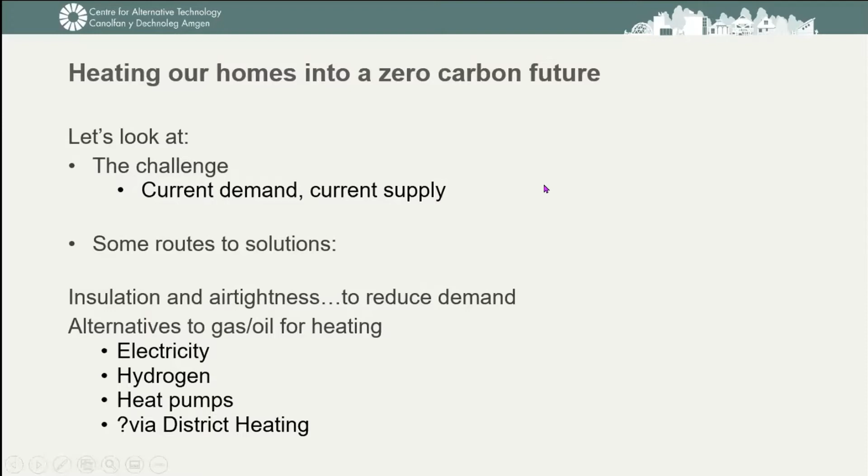So we're sometimes reassured by the idea that 41% of our energy this year or this month or today has come from renewables. But then we're faced with this data, which suggests otherwise, and this is our domestic energy use.

And it's not so very different from our national energy use in lots of ways, in that we use a lot of gas. We use a lot of gas in heating our homes. In particular, we use a certain amount of oil. About 25% of the energy we use in our homes, which isn't just all for heating, is electricity, and then there's some use of biofuels.

So how does that fit the 41%? Let's have a look. That 41% is just 41% of our electricity demand that is dealt with by renewables.

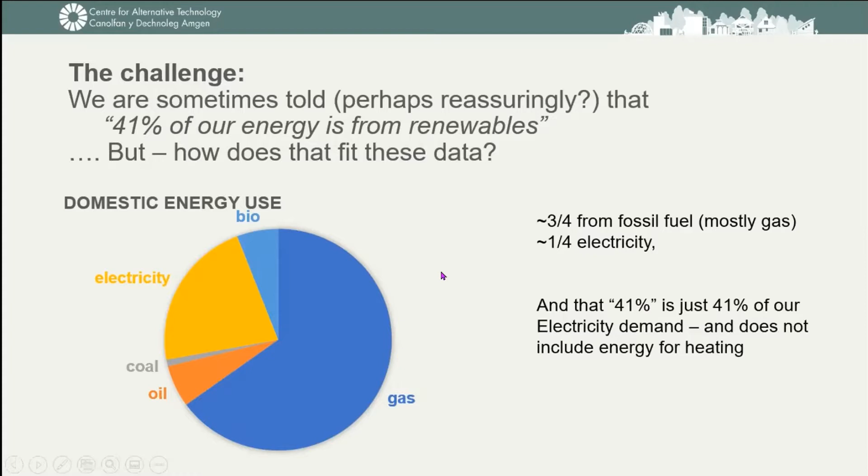So it doesn't include very much of the energy for heating at all. So if 41% of that quarter there, that was yellow on that one, is from renewables, then essentially none of the rest is from renewables.

And if we use 3/4 of the energy used in our home for heating, that's about 8 times more energy than is currently generated from renewables in terms of our in-the-house proportion, or 7 times more than renewables plus nuclear, which is a low carbon energy source in at least many respects.

And if we include biofuels, it's still 5 times more than renewables. The energy we use for heating is still 5 times more than that proportion than is generated from renewables.

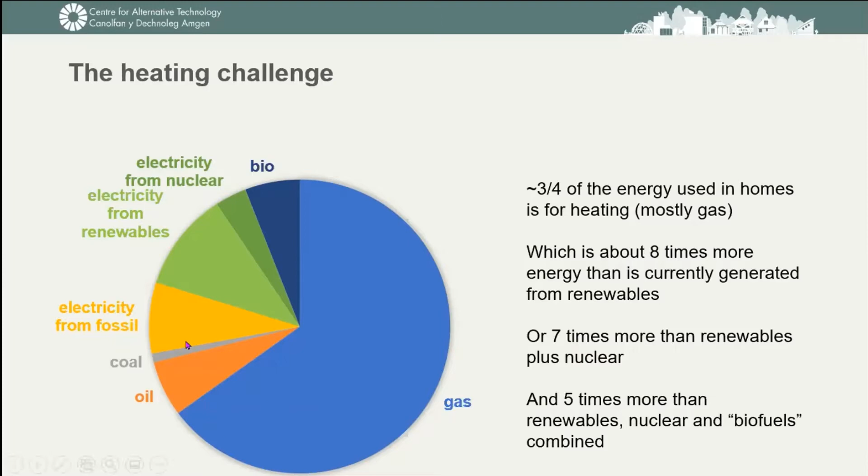So we've got to do something pretty drastic to generate enough more energy to cover that, or to reduce our energy demand so that we're within that range, within the range that is supplied by renewables, or that can be supplied. So we probably need to approach this from both ends.

One additional challenge is that our heating demand, as we're all here sitting with at least cold weather outside the windows, some of us warmer, some of us cooler, some of us in dressing gowns and warm jumpers, some of us with just a bit of heating on, very aware that there's a seasonal dependence to our heating.

We use something like 6 or 7 times more energy per day, per week in the winter for heating than we do in the summer. The summer being predominantly for hot water, at least. And this doesn't include any significant demand in here for cooling.

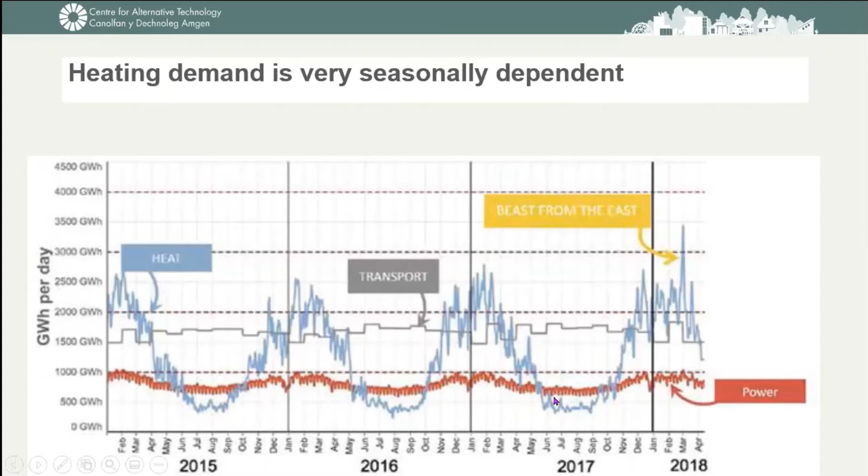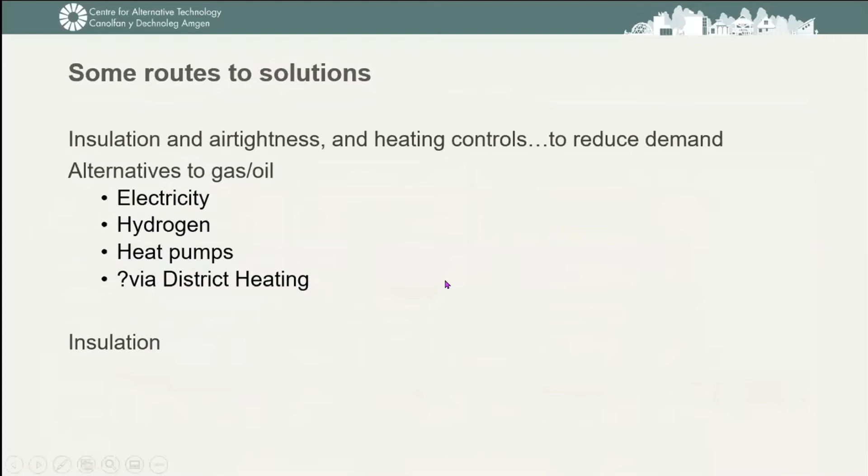So, reducing these heat losses from our home, we want 250 to 300 millimeters of loft insulation. That's a foot in old money, or most of a foot, not the 2 inches that has probably dropped to an inch that people may have installed 20, 30 years ago.

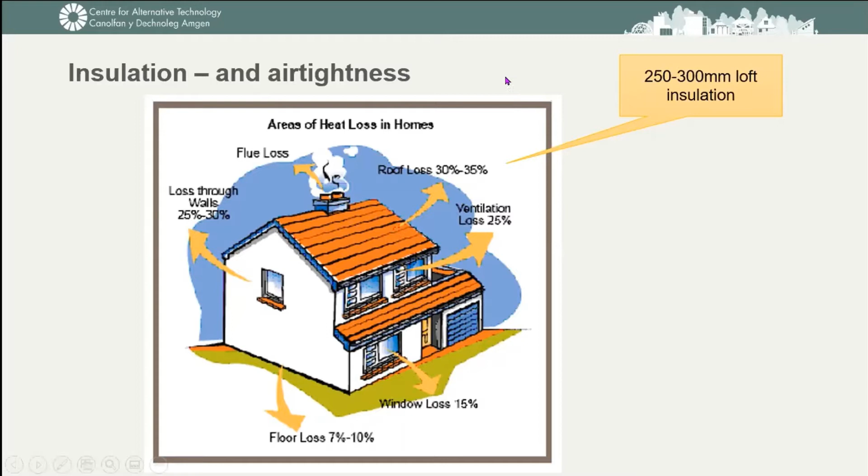A good loose layer of that much loft insulation. If it's glass fiber, if it's a foam insulation, then maybe half of that will do the same trick. Half that thickness will do the same trick, but that's still 6 inches.

We need to stop drafts. They're another huge energy loss, where all of the warm air from the home is drifting, being blown, being sucked out from—it's not just windows, it's out through all the penetrations in the envelope of the building, the heated envelope. Above me here, I've got a light fitting. There will be heat, warm air, being drawn upwards around the light fitting out into the loft space, because warm air is buoyant and rises.

The loft hatch is a major point for this, and there'll be cold air coming in around power sockets downstairs, and drafts under doors, around plumbing fittings and all sorts. So, reduce our drafts and then organize them.

We do need some fresh air. We absolutely do need some fresh air, and mechanical ventilation with heat recovery, MVHR, is one way of sorting that, or on-demand extract ventilation, which is a general extract from kitchens and bathrooms, boosted as and when the humidity and the need is high. So the first two are loft insulation and drafts, basically.

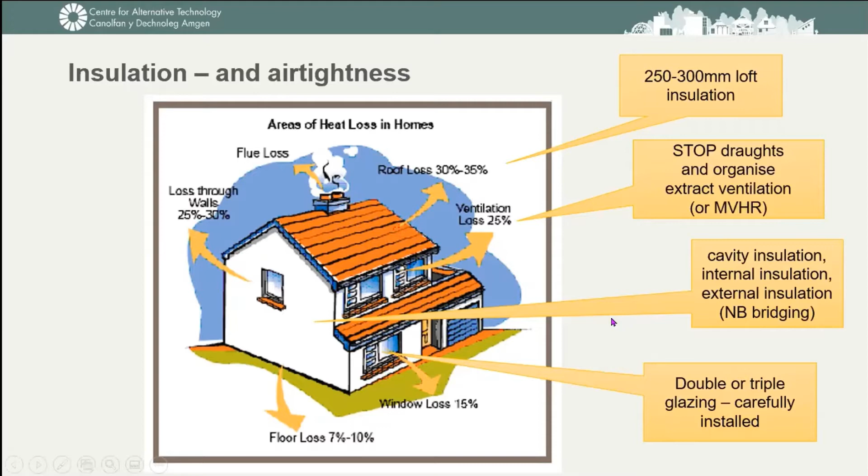Not just drafts, but what's called thermal bridging, where heat can leak out around apertures like windows and doors, because the window reveals are a shorter pathway for heat to get through. I'll leave it at that for now.

Do we live in all of our rooms? Do we need them all equally warm? Do we have choices in that as to which rooms we heat, to what temperature, at what time of day? Generally speaking, the answer for most of us is yes—we can make those choices.

We may be able to do that by managing the on-the-wall thermostat, or maybe not enough RAD-stats, thermostatic radiator valves. Of course, we know about them. Do we use them as well as we should? Can we encourage other people to use them more? Turn them down in rooms that aren't occupied and don't need heating.

So, controlling our energy—increasingly it's becoming possible, as there are more and more electronic-based devices that can measure the temperature, the humidity, the air quality in spaces, monitor them, and then manage our heating as a result. That may be a direction we want to transition to, particularly if we need an upgrade in our heating system, so we're going to be going for an upgrade in our thermostat system as well.

We may want to go for something just that shade more in the way of investment to control our energy down. It can predict—these devices can look at the weather, look at your living patterns, and predict which rooms you're going to want warm and when.

None of these things are absolutely straightforward. There's no one solution that fits all, but it's a case of looking at your needs and fulfilling the needs, and being prepared to interact with it in lots of ways, actually.

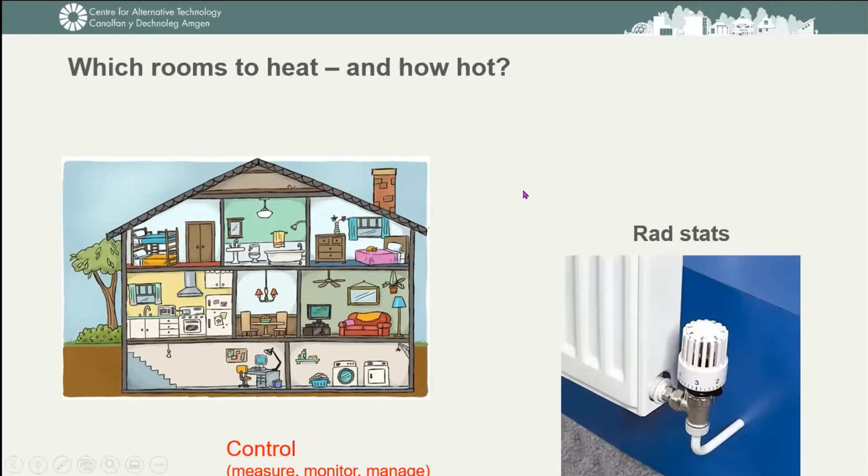So the different ways we can replace our oil and gas in heating—sorry, I should have had a transition slide there, I didn't. Okay, we know how to use electricity for heating.

I've got a little standing electric heater in my room here. It's just catching up a little bit of heat so that I don't need to heat the rest of the house. It's sort of one more like this, really, in lots of ways—fan heaters, radiant heaters. This one's actually more of a convector. This is a convector on the wall, but is it a storage one? It may be, I'm not too sure where the picture came from. Or a living flame equivalent one, which is mostly light, but it generates some heat into the room too.

But if we're going to replace using all that oil and gas with electricity for heating and still provide the same amount of heating, we're going to need to go for 8 times more electricity to do that. Obviously, we can bring that down by insulation, and we can do that individually—we can insulate our homes. But it needs policy action to take that out across everybody in the country to reduce those needs.

We also need electricity available at the amount we need when we need it. So that may be storage of electricity, and it may be storage of heat to manage that. We're not in a position to store heat usefully between summer and winter. We have plenty of heat around us in the summer, we need it in the winter. But storage for electricity is on the rise. It's not on the rise as fast as we'd like it to be in order to achieve this, but it's on the rise. So electricity probably can't be relied on to do the job we need, not on its own at any rate.

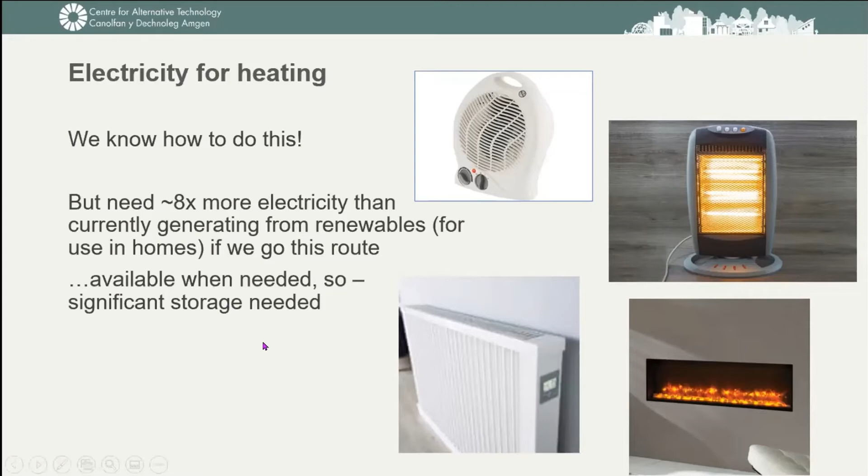Hydrogen can be produced when there's excess electricity in the system. So when there's plenty of wind and or plenty of sunshine, and not as much electricity is being required, water can be split into hydrogen and oxygen, and hydrogen produced and transported to where it's needed.

Hydrogen can be burnt sort of on your cooker. If you haven't transferred to electricity for a cooker, it's probably a good move to do that, transfer across for an electric cooker. This is a hydrogen-ready gas boiler, or a hydrogen fuel cell, so it can be used as if it was a gas boiler in that sort of setting.

Gas appliances need some adaptation. Many of us will remember the adaptation required from coal gas to natural gas back in the 60s, 70s, around about 1970. It was rolled across the country. Everybody, every home with gas had to have those adaptations in their boilers, in their cookers, so that we could move to natural gas. The same, up to a point, is possible with hydrogen.

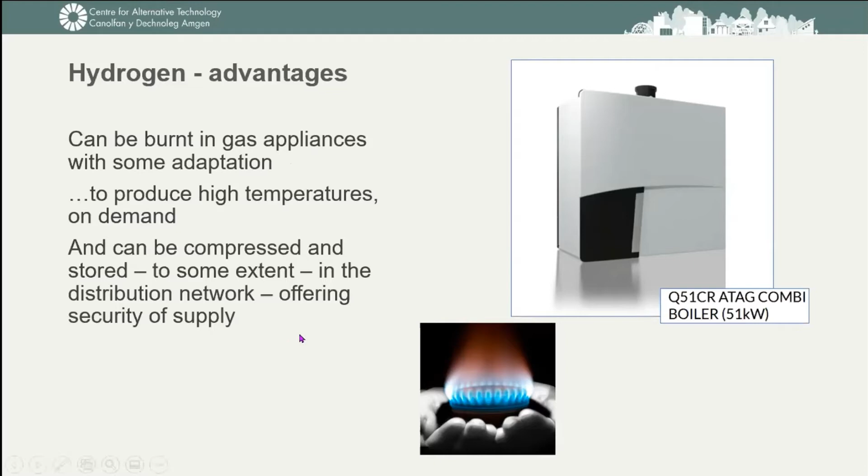Hydrogen's a bit tricky. It's a very, very small gas molecule, and it escapes much more readily than a methane molecule from wherever you try to store it or transmit it. Not in a plume of hydrogen, not in a dangerous, burnable, explodable way, but in a way that pipes may need further lining and that sort of thing. Hydrogen can produce high temperatures, and we just talked about net distribution and storage.

But it's quite expensive to produce, because although we can split water by electrolysis, and that's called green hydrogen - green in terms of eco - and that can be done at 80% efficiency, so we only lose about a fifth of the original energy. I think that's before transport.

Another way of producing hydrogen is by extracting natural gas, that's methane, through steam reformation, which is a chemical process that releases carbon dioxide. Methane is carbon and hydrogen combined, CH4, and combining that with water, the steam can release carbon dioxide in one direction and hydrogen in the other. So doing that requires capturing that carbon dioxide, otherwise we're back where we started, as if we were burning the gas in the first place.

And carbon capture and storage is under development. It's been under development a while. We know it works at lab scale, but so far development to a larger scale hasn't quite got there.

At best, it looks as if this second route could potentially be about 65% efficient. In other words, 65%, two-thirds of the energy from the electricity would be transferred onwards into the hydrogen as it would be supplied to us. Only a third would be lost - a third is still quite a lot. It means we have to make one and a half times as much electricity if we're going to be supplying the energy as hydrogen as if we were supplying it as electricity. So yes, either process allows hydrogen to be produced from spare electricity, but neither comes without challenges in terms of the production of hydrogen.

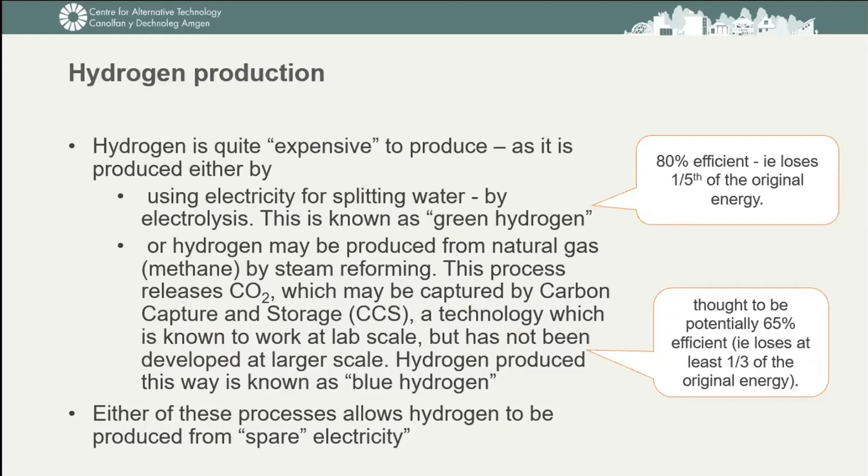The other thing about hydrogen is that it's actually a potentially very useful fuel. If it's stored, then electricity can be generated back from it and transmitted to us in times when there's no wind and no sun. So it's one of those mechanisms for energy storage to manage the intermittency of wind and sun.

It's also a mobile fuel. This image here is a hydrogen car. It's got a tank, a hydrogen tank, compressed. We're probably familiar with compressed propane tanks, cylinders. This car has hydrogen in a similar cylinder and runs on hydrogen.

Cars, we know we can do with electricity. Trains, we know we can do with electricity. But cars, trains, tractors, airplane fuel, mobile fuels are at a premium in a different sort of way. Hydrogen is a possibility for that, but we need to be able to supply that hydrogen. And any cubic meter of hydrogen can't be used both for transport and for heating. That goes without saying.

The current targets for producing hydrogen, government production of hydrogen, are about 1/20 of our current gas use. And that doesn't account for the possible fuel use by vehicles as well. So we've got a long way to go, and that's by 2030, that's 8 years hence. In terms of the requirements for hydrogen to do the things we might like it to, that's not a particularly ambitious target. Probably in terms of technology, it is an ambitious target to be able to achieve that. So it doesn't yet match.

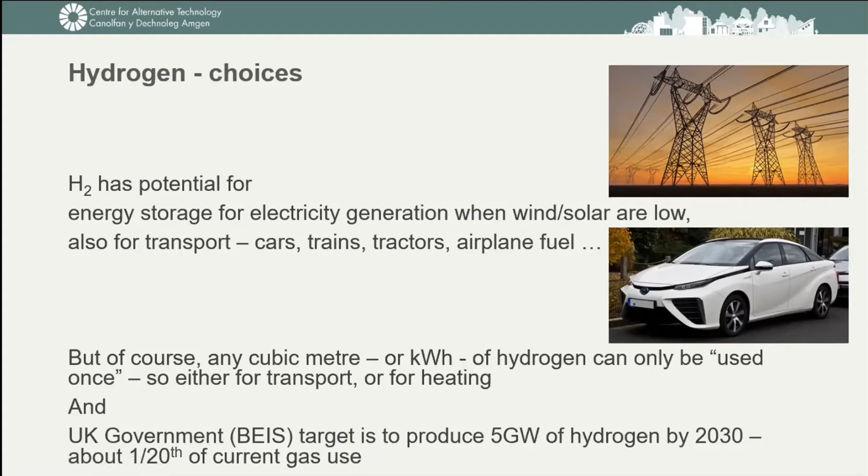So what's our next choice? Heat pumps. Heat pumps are energy multipliers. They're not perpetual energy machines. That would be lovely, but they're not.

Heat pumps work like a fridge. The fridge in your kitchen uses electricity to catch heat from the cold inside the fridge, the milk, the everything else inside the fridge, and throw it out into the air around. That's why the back of the fridge is warm and needs ventilating, because it's warm. In order to keep it efficient, you need to ventilate the back of your fridge. And of course, all the time, because the fridge can only insulate so much, there'll be a certain amount of heat going in from your kitchen into the inside of the fridge, and the compressor system in the fridge, powered by the electricity, needs to suck out that heat.

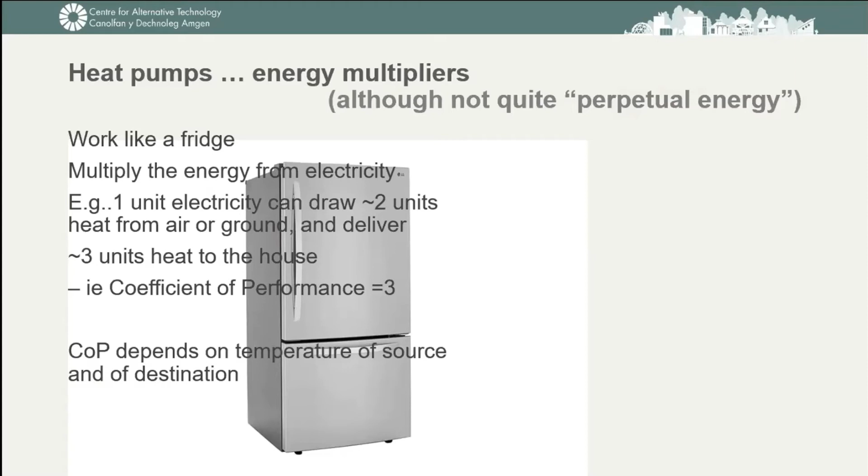And a heat pump, just like a fridge, can draw out more heat than is supplied by the electricity. So probably your fridge has a coefficient of performance of 3 or 4. So 1 unit of electricity taking, let's say, 2 units of heat from the air or the ground or the fridge, will deliver 3 units of energy as heat. In terms of a fridge, it's delivering it into your kitchen.

But if we're talking heat pumps, it's delivering it into a delivery system, which is very like the delivery system your gas boiler, assuming you've got one, or oil boiler or whatever you have, delivers around to the radiators in your house. So it's delivering hot, or at least thoroughly warm, water around your house. So in this case, this is called a coefficient of performance of 3. 1 unit of electricity plus 2 units of heat gives 3 units of energy. So, you know, it's a 3 times multiplier.

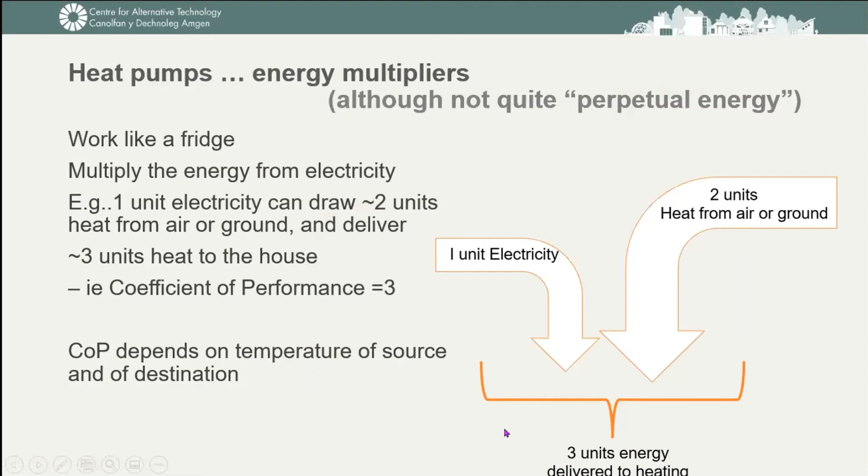Depending on the temperature of the source of the heat that it's drawing out, and of the destination that it's delivering it to - this could be the air or the ground, and the heating could be your radiators, could be your hot water, it could be underfloor heating. Each of those are delivered at quite different temperatures. So let's look at a couple more details of what do these things look like.

An outdoor air source heat pump, well, it would be outdoors because it needs to draw heat from the outdoor air. A fan draws the air past the coils, and the compressor sits in here somewhere, and does the same job as the compressor in the back of your fridge, takes heat from one place and delivers it to another. That's where the electricity is used. Delivers heat in general to a cylinder unit, although there are ways it can work without that, and can deliver heat to underfloor heating, radiator, and to your hot water in your home. Not so easy in some homes, but let's look at where we can do it and where we can't.

It's most efficient where it's delivering to a reasonably warm rather than hot output. So underfloor heating has got the highest coefficient of performance. It's less efficient at delivering hot water at 60, 70 - 60 usually is what your hot water would be set at. It's a multiplier of 1.5 to 2 times that when the air temperature outside is 0 to 4. And we need most of our heating when the air temperature is low. So we need to look at its performance when the temperature outside is low. So that's roughly what we're talking about there.

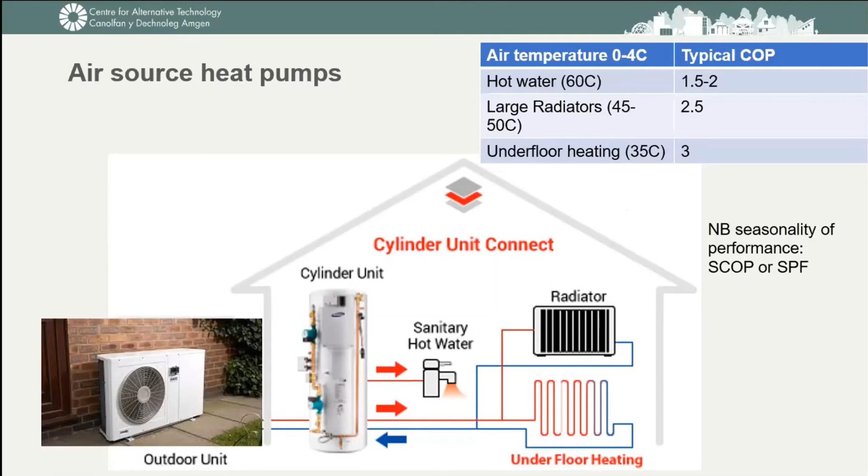It becomes less efficient as the air gets colder. That's just the way of life. More questions on that may come through later, and we'll come back and look at it more.

Ground source heat pumps draw heat from under the ground, and this is one way it can be done. It requires a fair amount of excavation in your garden, a playing field, or wherever, or it can be done through boreholes down into the ground, not deep enough to get earth core temperature heat, just to get heat from maybe 50 to 100 meters into the ground, where the temperature is steadier all year round.

So it's 8 to 12 degrees, depending on whether you're on the south coast in Brighton or in Aberdeen. 8 to 12 degrees would be the range of your ground temperature. That gives somewhat higher coefficients of performance here, but at more expense, primarily because of the excavation or boring work needed for the borehole.

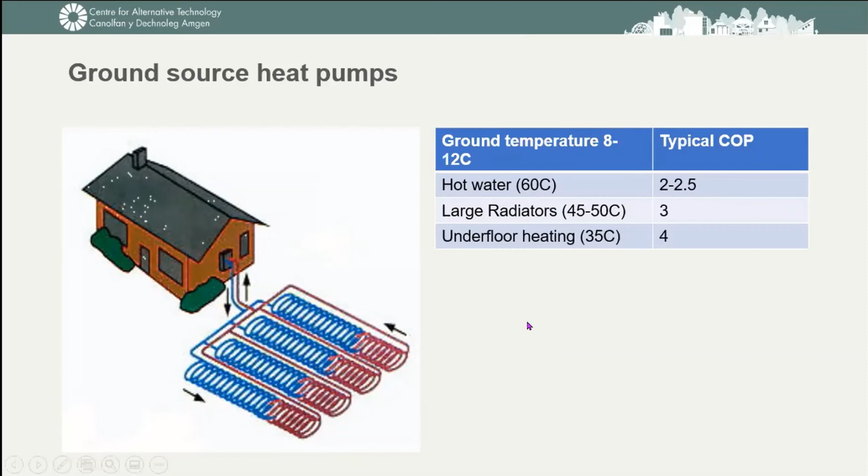Some of the challenges I've referred to are that they're quite expensive. So if we're going to roll this out at, what did the government say, 600,000 a year by 2028, that's going to require significant financial support and incentivization to get the market to that point.

So far, even our really rather good local plumber doesn't know anything about heat pumps. The skills aren't out there in the trades. They're not particularly complex skills compared to many skills that are out there. They're a stage beyond what plumbers know at the moment, but it's a 2 or 3 day training rather than a 2 or 3 month training—maybe more than 2 or 3 days, plus onward support as they learn it.

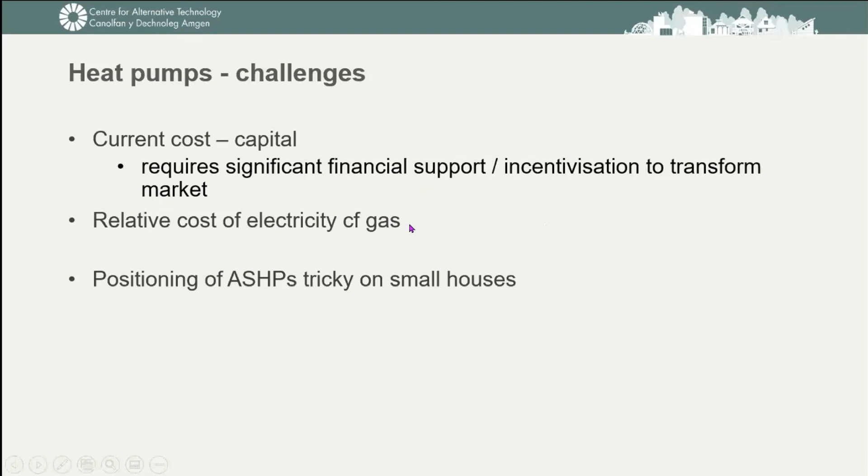We also have the challenge that electricity is currently quite a lot more expensive than gas, although gas is going up at the moment. So heating with electricity is more expensive than gas, even using the multiplier effect of a heat pump. It's going to take a while for the heat pump to pay itself off because electricity is more expensive. One reason is that electricity is taxed in a way that gas isn't—I'll leave others to look into that—so there's a bit of a subsidy and tax imbalance between electricity and gas.

Large homes are not a great problem at all for an air source heat pump—you've got plenty of air swirling around the house. But I had a phone call with a friend of a friend recently about a terraced house in Manchester. They said, we'd like to put in a heat pump, but realistically, if we put in an air source heat pump, the walls beside the backyard, the back of the house, we're going to end up with a cold well of air because a lot of heat's been extracted from it.

A cold well of air outside the back door probably isn't what they want, and anyway, it makes the heat pump less efficient. So it's a bit of a challenge as to where air source heat pumps can be installed on small houses. I think solutions haven't been developed yet, but I think they will be.

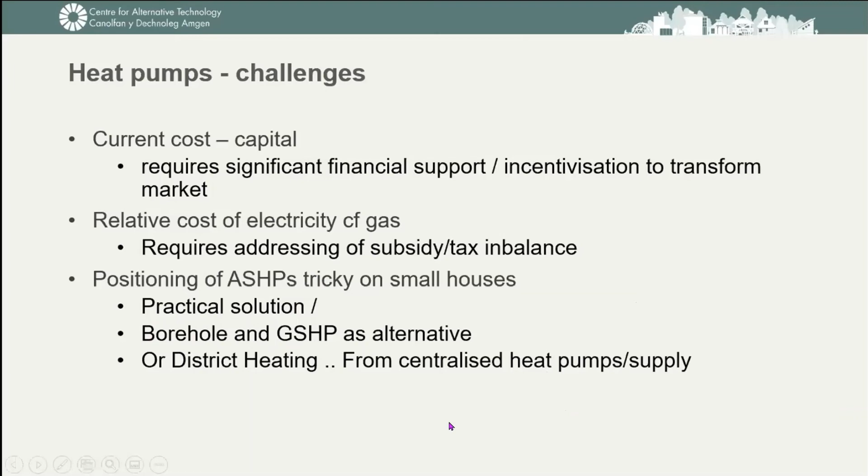So we want practical solutions for this. Boreholes and ground source heat pumps are an alternative for smaller homes, but district heating from a centralized supply is probably the appropriate area to go on to here—a heat supply which supplies a grid of heating.

Centre of Bristol is currently, as anybody from Bristol may know, being dug up to have heat mains put in underneath, across main roads and under roundabouts and all sorts, because they're able to bring in hot water from the waste incinerator at Avonmouth, bring in hot water up the Avon and discharge that into a heat main facility in the centre of Bristol. It'd be interesting to know what anybody who's local to there knows more about it.

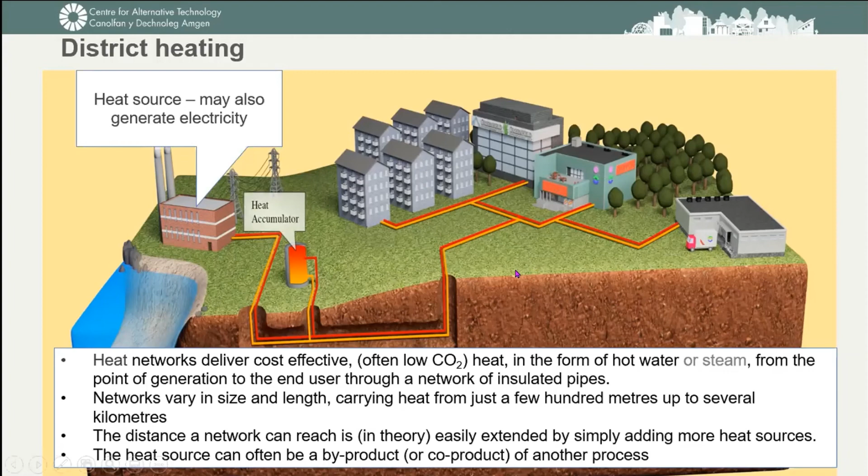So the heat source can be a byproduct of another process. We don't tend to like to live particularly close to most of the biggest available heat producing processes, incinerators being one of them, industrial plants being another. But there are certainly places where heat would be more available, and maybe we just have to tune down our sensitivities a little bit on that. I don't know.

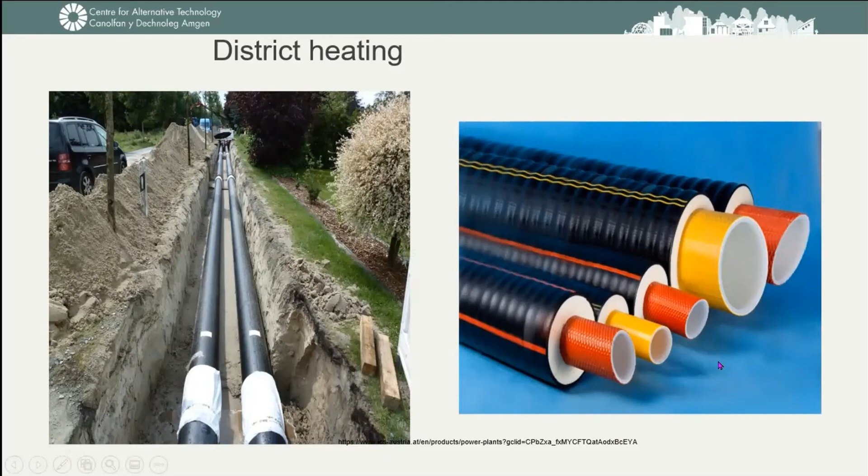So that's the sort of excavation work that would be needed for district heating. There's a flow and a return, so one of these will carry hotter and one cooler water out to the different extents of the district heating network. And they're well insulated pipes carrying your hotter and your cooler water. Can be supplied by power stations, energy from waste, industrial and commercial processes.

Yes, basically that's solar thermal. Yes, heat networks can be supplied from solar thermal. Most of our heating isn't needed at the same time of year as we've got plenty of sun. That's actually surprisingly a more useful way to supply cooling, but not going into that today either.

CHP units can use, for example, hydrogen or natural gas at the moment, or biodiesel, to produce electricity at, let's say, your local supermarket, and also to provide the heat that's needed, combined heat and power. You will know that your car engine at least gets hot. What you want it to do is to produce power, in this case drive power, but you need to get rid of the heat. This is a way of using the heat off a generator to do useful things as well.

Thermal stores, mostly just large amounts of water, can be used to smooth variations in the heat supply and demand. And yes, I was saying these systems can use a different way to produce the cooling to provide seasonal versatility there.

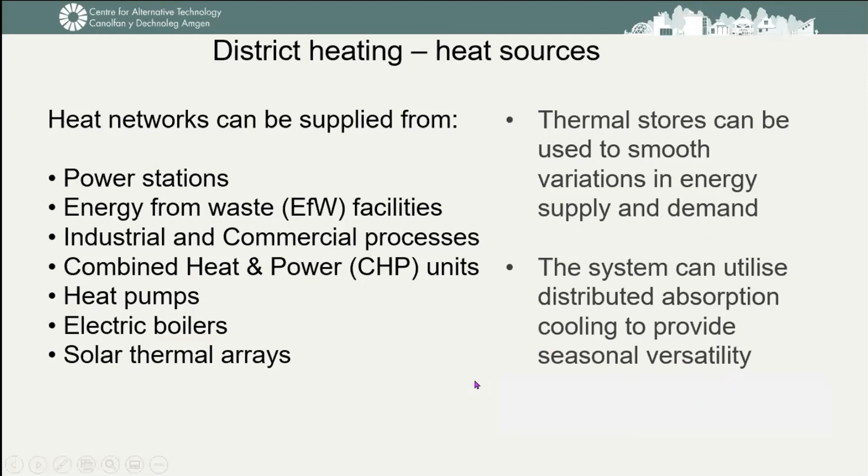So overall, I don't know what I'm doing on time because I can't see my time at the moment.

Sadly, there's no one solution fits all that we can roll out across everybody. Different homes need subtly different approaches. But I would say absolute priority is to reduce demand. We power down before we power up. And for people who have read the Centre for Alternative Technology's work on Zero Carbon Britain, that emphasis of powering down before we power up, or alongside it, but knowing that powering down is the priority, comes through strongly in our work on that.

And then probably using district heating for many people, heat pumps for others. District heating works best where the demand is fairly compact because you don't have to run it out so far. So isolated homes and farms won't benefit so much from the potential of district heating and may need to go for heat pumps instead. You know, there's plenty of midway suburban areas where you're not quite sure whether you're compact or you're further distance.

That will need sorting. At least 50% of Copenhagen runs on district heating. It is a familiar technology. It's well tried, well explored, and it's ready to roll out. Yes, your roads will have to be dug up again, but there we go. Digging your road up may be the least of your problems compared to climate overrun.